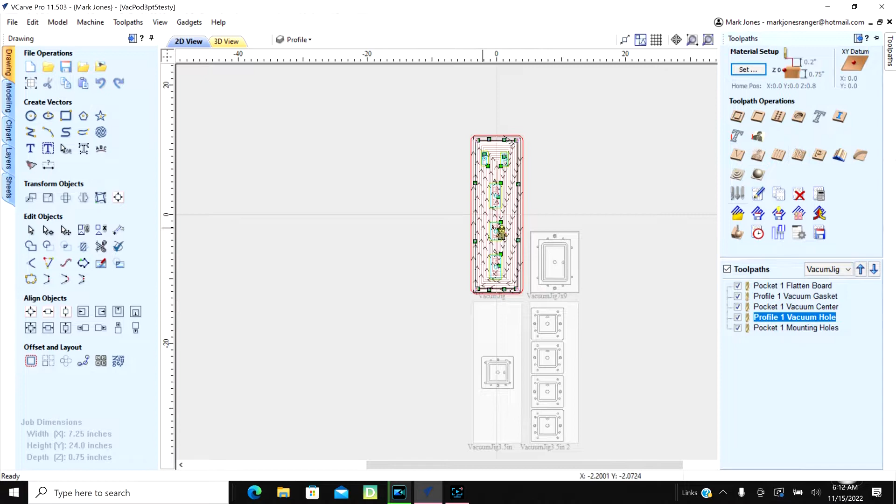All right, we're going to go ahead and open this vacuum pod. I've been learning about layers and making tool paths using the layer and automatic feature, and that's really turned out to be a real blessing for me. I've got my tool path out here, and this is what I'm working on.

Let me go ahead and turn all my tool paths off. Basically, this is a vacuum jig. This is a piece of 3/4 inch vinyl - it's not vinyl, but PVC siding that's got wood grain on the backside and plastic smooth on the front.

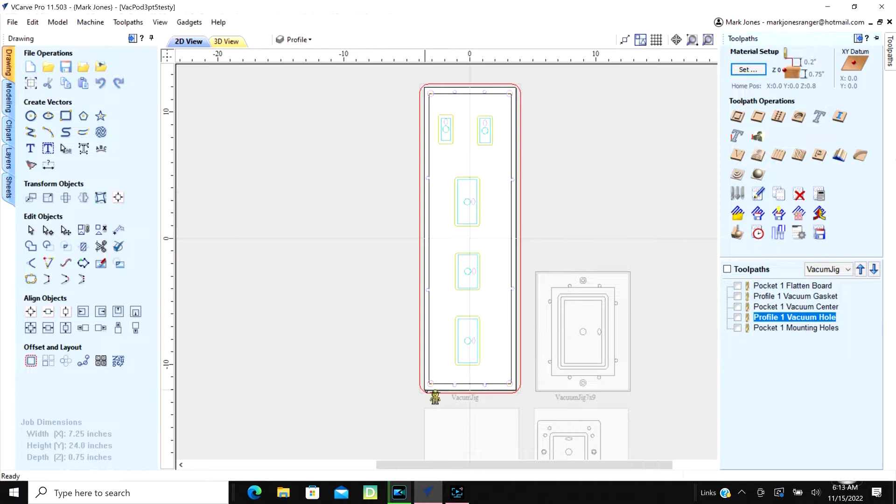What I'm doing is making a Ranger puzzle box, and this is the board. It's 24 inches long by 7 1/4 inches wide, and this fits in my CNC, which is 25 by 25. I've put 4 mounting screws on the corners, and I'll use brass screws and screw them down. They have a recessed head, and I'll go down about 3/8 on the recess and put them in there.

Then I put locating pins around here to hold the board in when I'm locating it, so it comes out pretty much exact. Probably that's not as important on this job, since it's going to be cutting out box joints all the way around each piece - this is like a 6-sided box joint box. When it's done, each piece overlays this at least a 1/2 inch to 3/4 inch all the way around, so that I don't cut into the gasket.

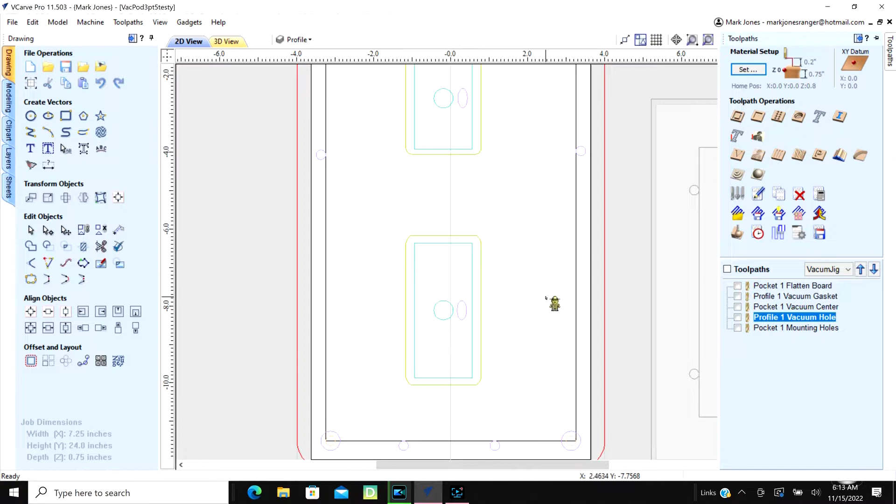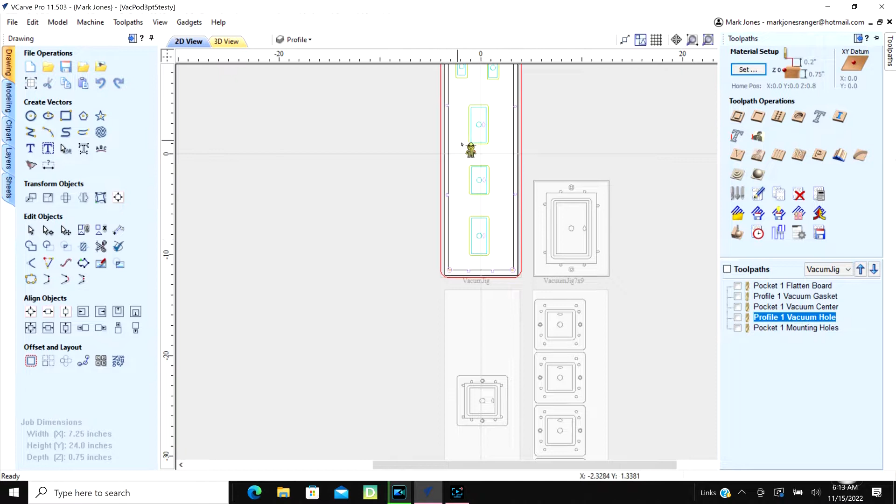It's kind of fun because when I made this, I created the sheet in my Ranger puzzle box with the vectors, and then I copied those vectors and brought them over here, so all my pieces are the same. In fact, this basically looks just like my puzzle box, because I copied the vectors and then modified this for the vacuum. So that worked out real well.

When I cut it, I found out during my previews that it was not cutting out these little ones. It just didn't touch them because I was using a 3/4 inch end mill, and that's the first time I've ever run into that. Generally I'll just cut it for whatever path it is, but since I've been doing layers, I overlooked it.

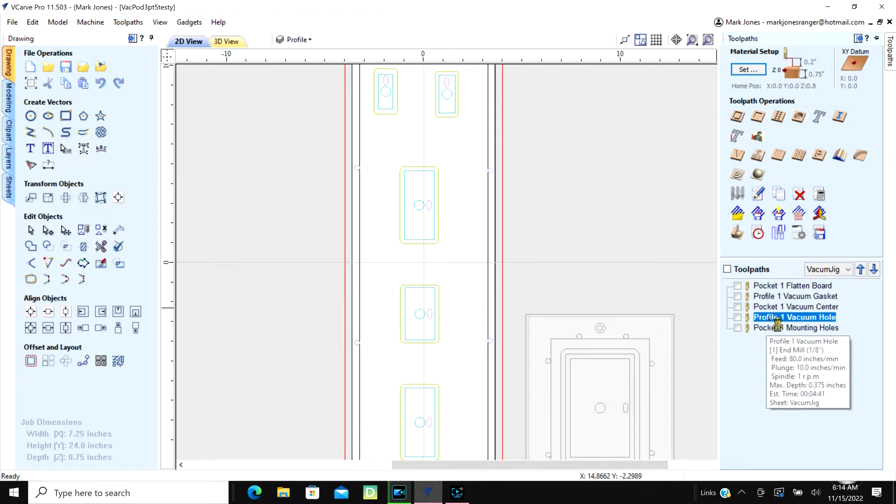I just brought the USB drive back in and loaded it back up, and modified this, adding 2 more tool paths right up in here, enough so the 3/4 inch would get most of it, then a 1/4 inch would get the rest, and then 1/8 inch would get down in here in these little pods. It's kind of fun how all that works.

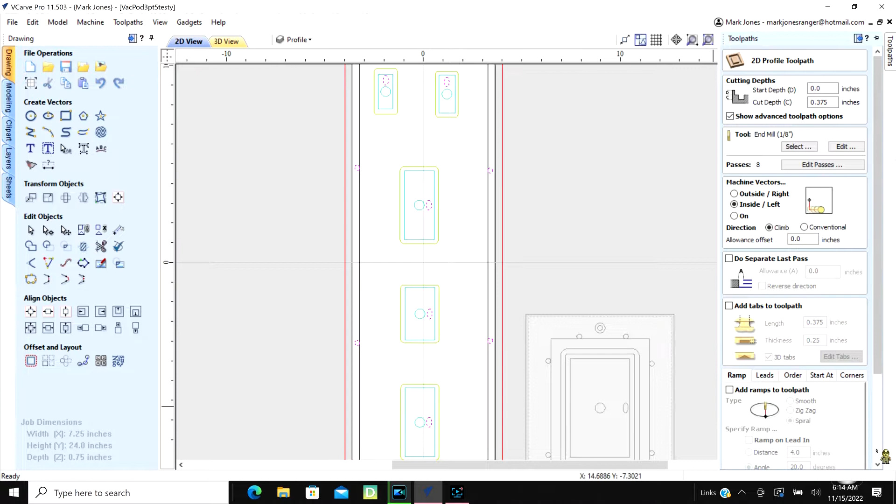Vectric software is so intuitive, it's just really good. All I would have had to do to know that is view it, and it would have shown it. But I was learning my layers and that stuff, so that's something you really ought to look into whenever you're doing these.

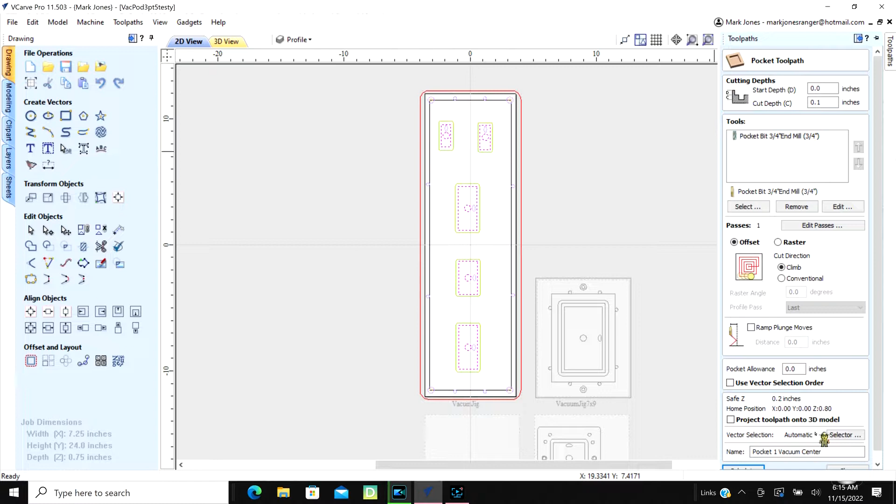This is where I added that in - I had pulled the wrong end mill up. This is just a pocket, and then I added the 1/4 inch and then 1/8 inch, and when I created it, it made the tool paths automatically. This automatic feature, you need to look into it - copy all your vectors to layers, and have a layer for each tool path. That's some sweet stuff.

I didn't see the real benefit of it until I started this project, and now I have tool paths that go across 4 different layouts or sheets, and these tool paths actually fit each one of them. So my tool paths I'm able to duplicate and just import into whatever new vector file. This is kind of my vacuum pod file, and I'll be able to jump back in here, and if I need to machine one, I'll just machine another. I'm keeping them all in the same file, other than keeping separate files for each one, which I can also do.

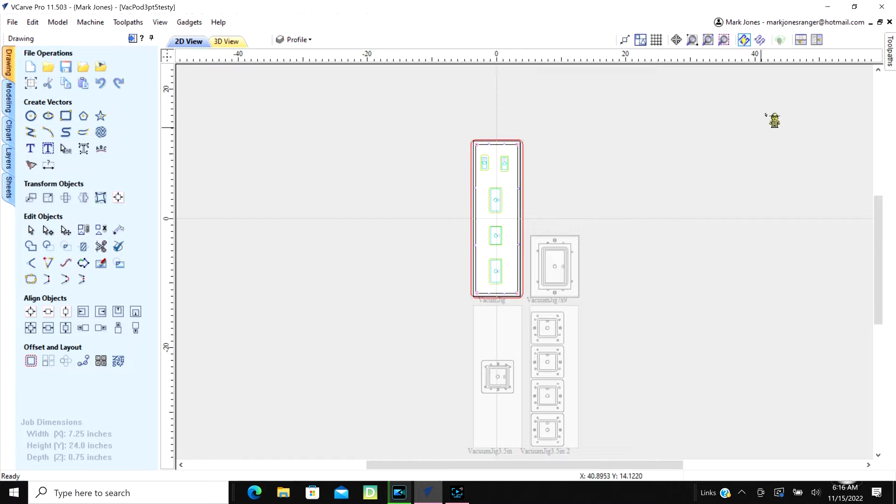But this works so far. I'm kind of learning that technique.

After we design this, I've got this. I'm going to the shop and we'll carve this out, and then when I do that, we'll put a piece of wood on it, 3/8 inch wood, and it'll fit down inside there, and turn on the vacuum and tell it to run its course.

I'll see if this can cut box joints on all 6 edges. This only creates half the box, so I'll run it again, and then it'll cut out the other side, and then that's a finished box. So that's kind of what we're up to, and let's turn this off.

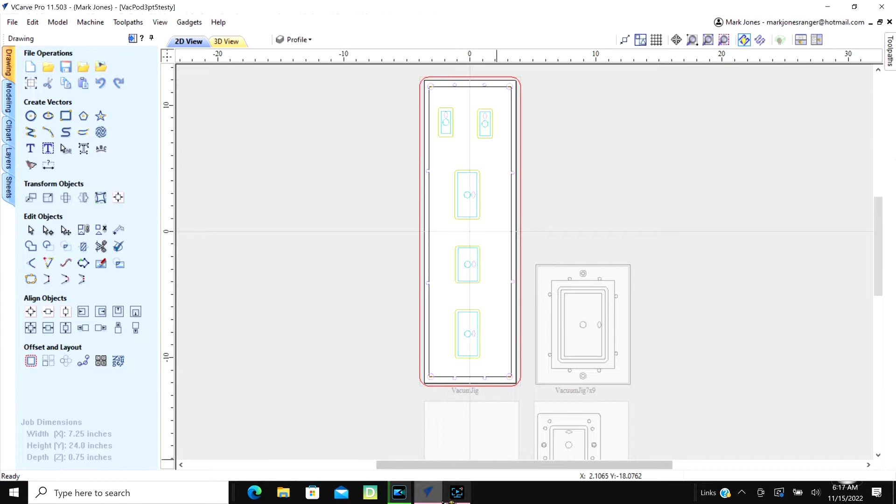All right, I've got this thing drilling the 3/8 inch holes, and as a starter I had to go ahead and put my corner holes in for my mounting, and then I'm doing the 3/8 holes. I just put minimal support, then put a screw down here to the very tail end, and I'm going to put one down here as well. Let me get that done.

All right, I went ahead and put another screw on this side, and when it routes out that other side back there, I'm going to go to the rear of the cabinet and pull this thing up and put a couple screws in over there so it'll be supported totally.

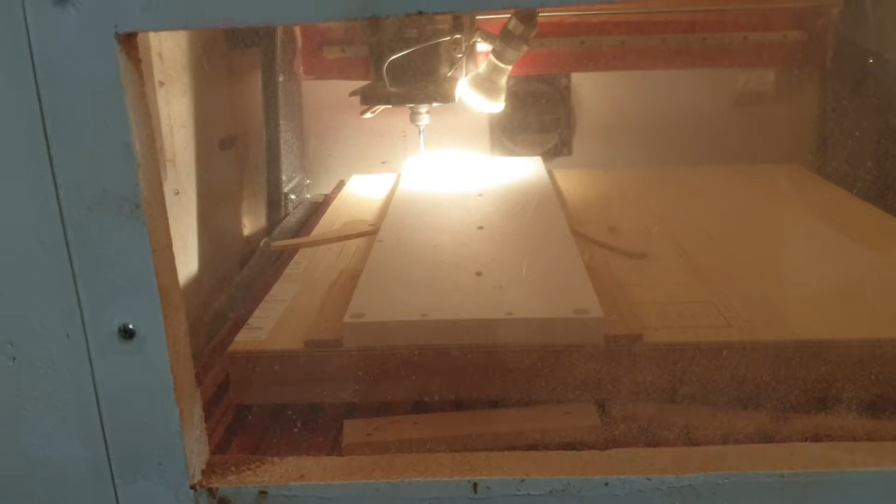Just drilling 1/8 inch holes. These are little 1/4 inch holes. That's the biggest hole that it's drilling, other than the little ovals in the middle. But I'm going to get it down to where it's going to start making the bigger holes. So I want it anchored, and then I can pull these supports on the side out of there if I want to.

All right, so I've got these down, and I'm going to go ahead and drill that out with a small bit, put a brass screw in there, and that will finish anchored. I'll have one on all 4 sides, let me get that done.

All right, got a brass screw on each side of one of those, so I'm ready to start doing the milling. This is a 24 inch by 7 1/4 inch piece of PVC vinyl, and it's got wood grain on the back side of it. It's very much the same thing as what they sell at Lowe's.

And I've got the smooth side up, and that's what I'm getting ready to mill it to. Let me go back to the front side and change the bits.

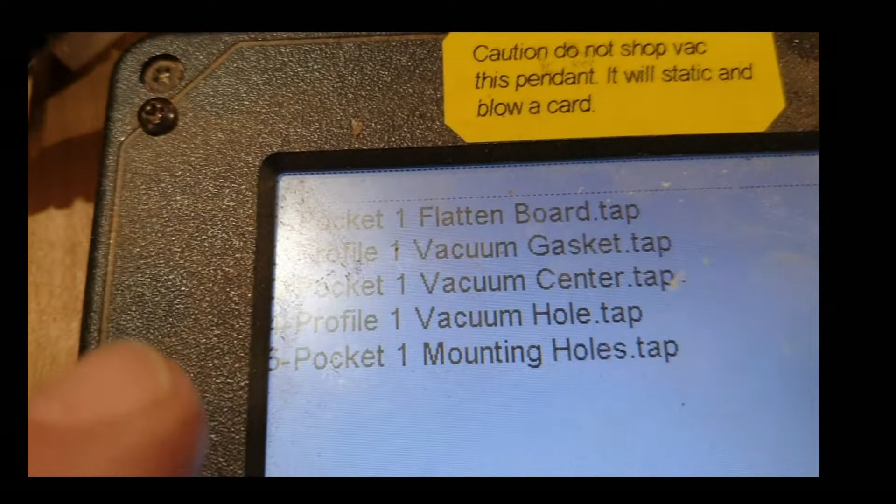All right, I've done the number 5 and number 4, which is the vacuum holes and mounting holes. So those are all drilled in, and those are 1/8 inch bits. Then the center tap, pocket 1 center tap, and then the vacuum gasket and flatten the board.

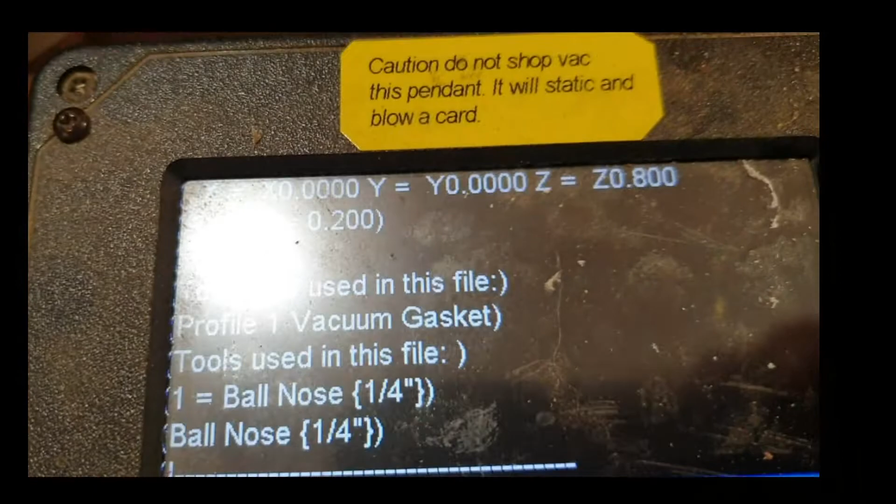So let's go to number 2, profile vacuum gasket, and let's see what kind of bit we need in that one. And it is a 1/4 inch ball nose. So we'll go to that and get that out and chuck it up.

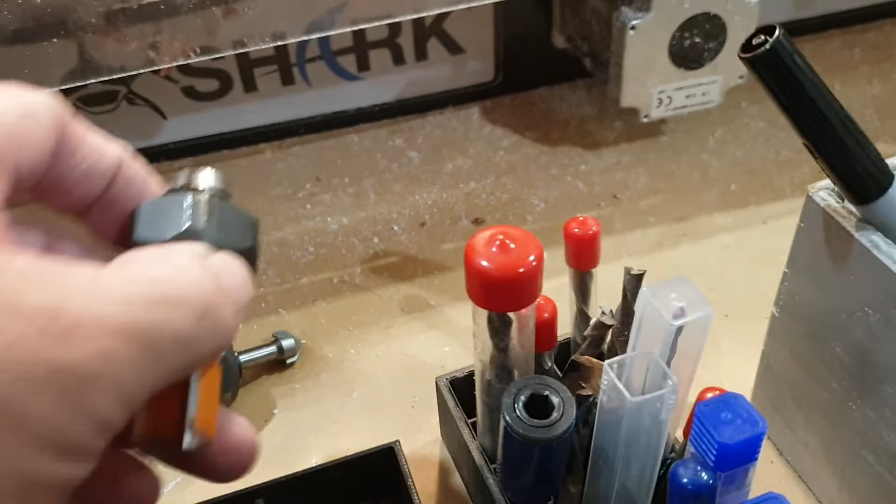You know, some of the things that I do, I'll generally take the bits that I'm using in the process and I'll put them in their own collet. Those are like $5 a piece. You can find a resource for them.

I just chucked up the ball nose that's 1/4 inch, and I just set my Z heights up here. I'm going to tell it to go back to its mobile home, so I'm just going to move the mobile home, and that makes it back to that mobile home right there.

I got a kick out of it. One of the guys said we have a home on the Shark. Well, we really don't, they're all mobile. In other words, you can make home anywhere you want to on this machine. In this case, it's the center of that X, which puts me at 0,0 on my X and Y, and the Shark actually brings it up a little bit higher, but it's ready to go.

So I'm going to go ahead and mill the ball nose, and it's the cord that goes into each one of these. So around each one of these holes, the size of my profile, I'm going to go around and route out a ball nose. I think it's 0.14 deep. So let's get that done.

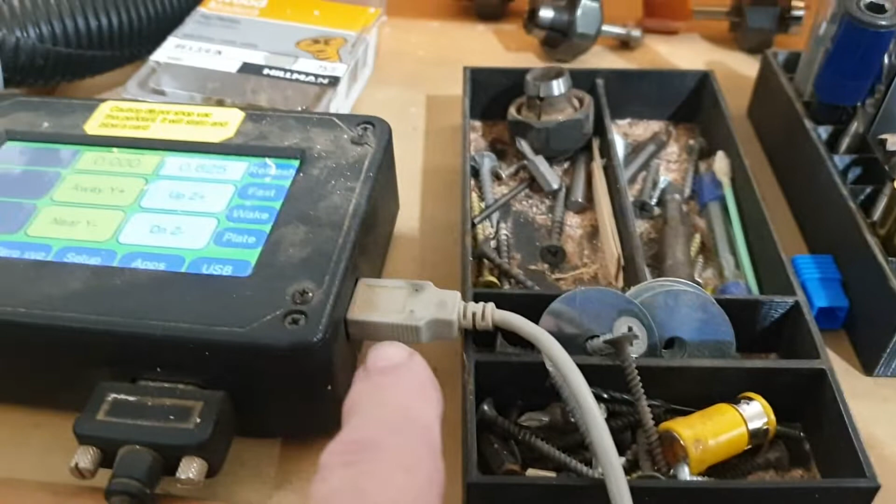A real quick tip is, instead of wearing out the port on the machine on the pendant, I use just a replaceable 4-foot cord, about a $6 cord or so, and I put my thumb drive in it so that I'm not wearing this port out. Just another little tip. All right, so let's go ahead and run the program.

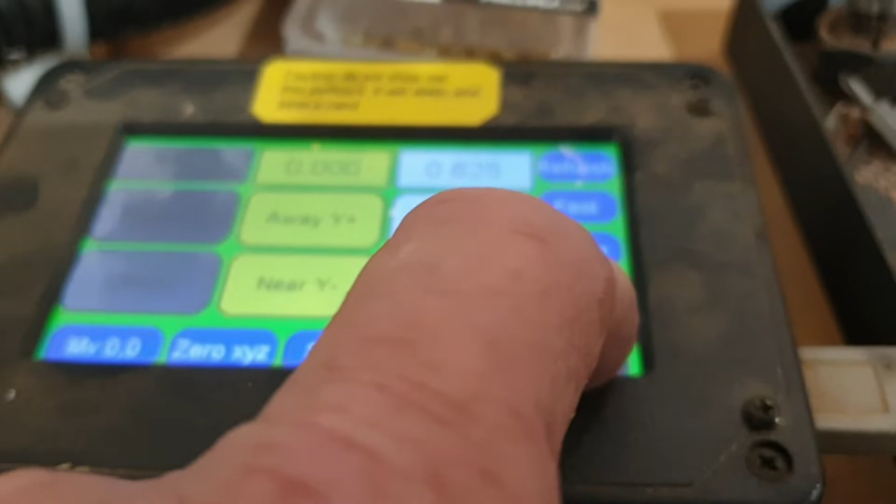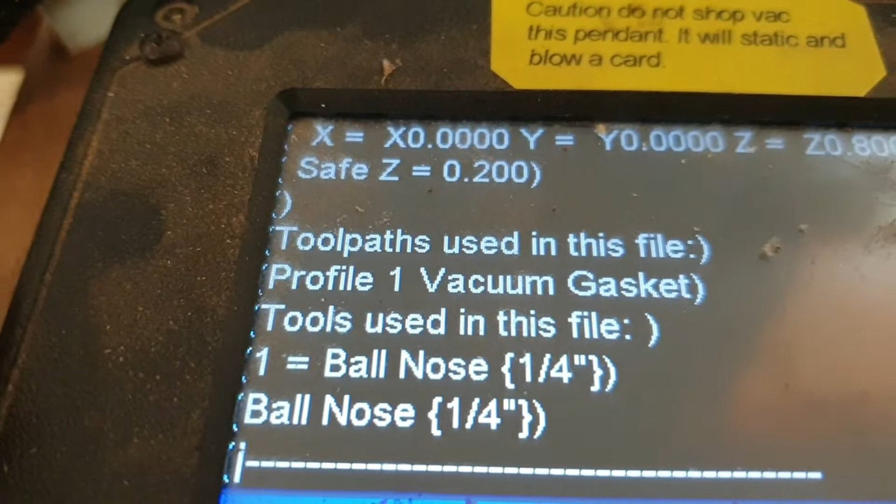I'm going to hit USB, and we're going to do the vacuum gasket right here, and I can go down and check that it's the right one, and it shows that it's the 1/4 inch ball nose, and we'll just tell it to go next.

This, do not use virtual. That's handy if your spoil board is not square, but in this case it's all flat, so I just leave that as an option. And then we click start, turn on the vacuum with this.

And it's going around, starting out going around my part. That's a little bitty small one. This particular vacuum jig has 5 areas of vacuum. My pump will handle 6, each one hard enough that you can't pull it off of there. And so that's going down through there and routing that out.

I'm going down to 1.14, and I'm using layers and the template to cut these all out. So these are copy tool paths using the layers and the template, which is kind of a new thing. This is the first time I've actually used this process. I'm using it on the actual board that I'm cutting, and I'm using it on this jig that I'm cutting.

So when I get done with this, I'll take a piece of 3/8 inch walnut, oak, or maple or cedar and put on the outer perimeters of these holes, the little round 1/4 inch holes. I'll put like a dowel or a little brass thing, stick it down in there. That's my pin location. Then I'll turn on the vacuum, and the vacuum will hold the board down, and then I'll be able to route all that out of there and go around and cut it out.

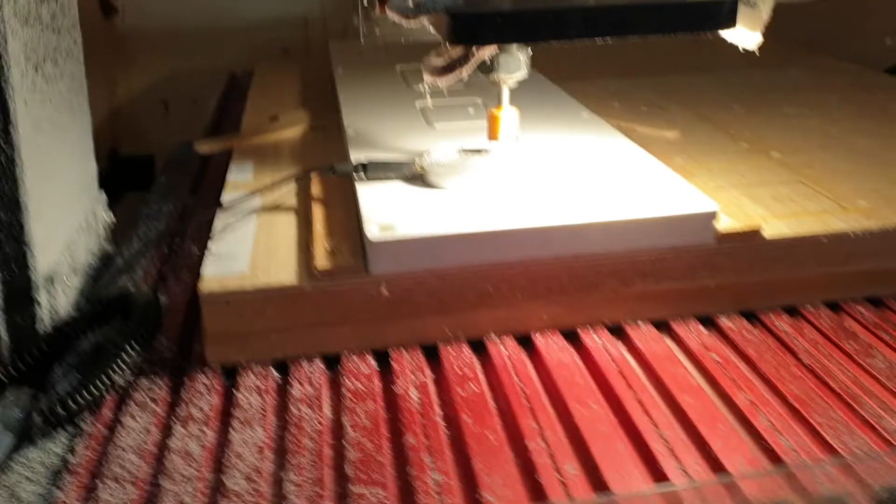Okay, I've Z'd that, so that 3/4 inch bit's ready to roll. Let's go down here and load up our program. That's just where I set that up, so I'm going to go ahead and do not split. I don't have to go back to home or the row home, it knows where it's at. I'll click start, turn on the vacuum. And it's going down there and it's putting a pocket in.

All right, so there's that. Now, in that design, it's supposed to make little round holes in there. So I really need to recalculate that because those holes are so small that I almost need like a 1/4 inch end mill in there because those won't fit with the holes in there. So that's kind of a funny deal there. I'm gonna have to go edit and add one in there with a 1/4 inch and try that.

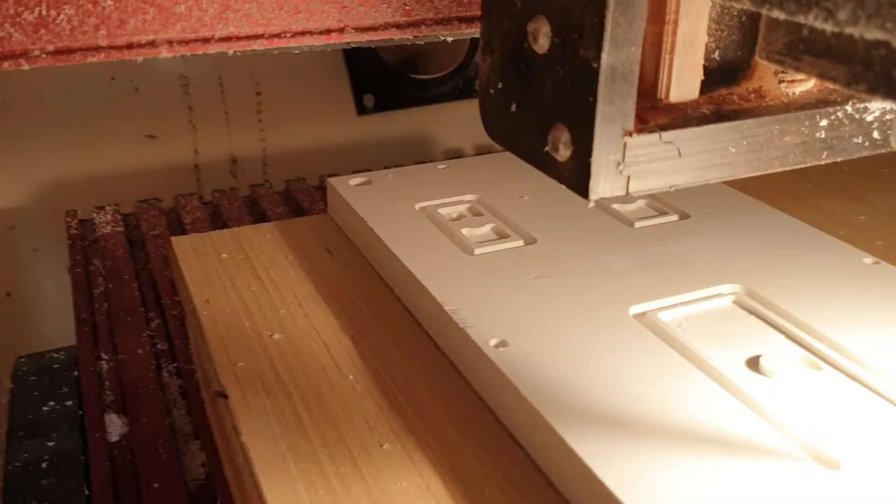The 1/4 inch was able to get in there but not totally clean that up. So I'm going to have it come back with the 1/8 inch, and it'll probably clean these corners up a little bit more, then go and do the back of the very corner and open them up in the center. Let me change the bit and put an 1/8 inch end mill in there.

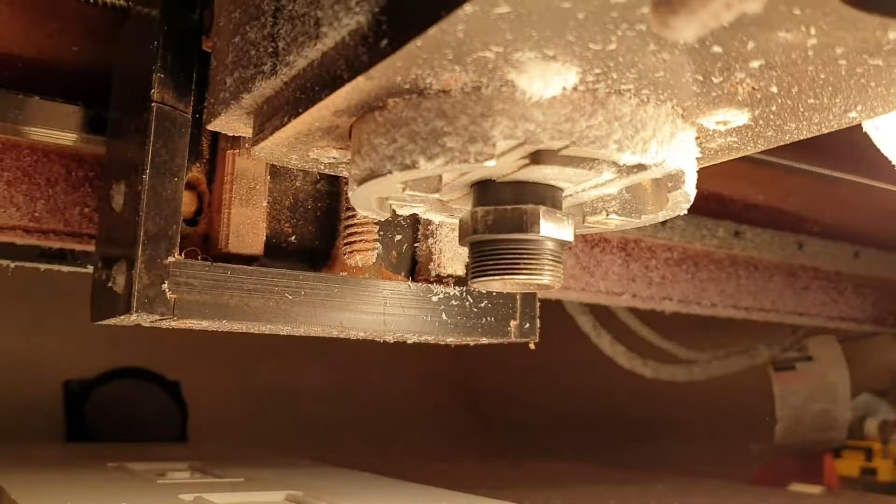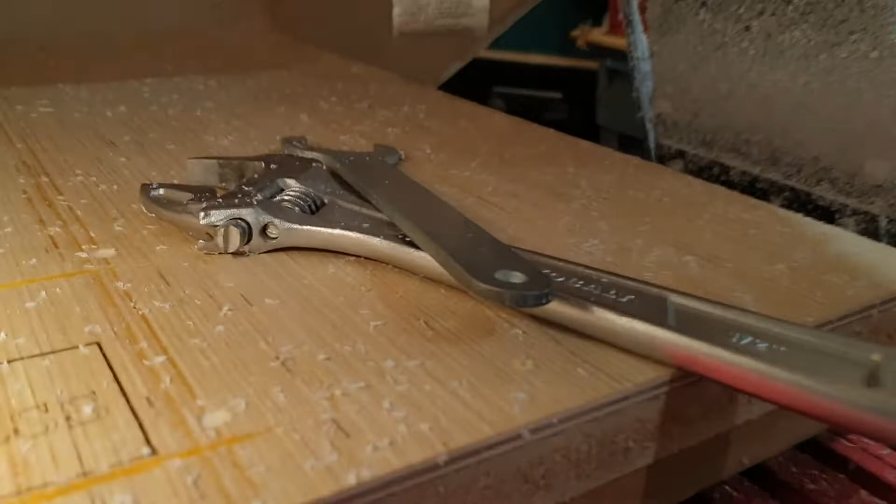All right, we'll put the 1/8 inch end mill in there. You notice I use a crescent wrench and a big wrench. That crescent fits right up there on that collet bolt and fits perfectly, so I don't have to wonder where it's at. Then the other wrench sits on that, so it's perfectly spaced. All I got to do is slip it up there. I've got another one of those thinner wrenches, but the crescent wrench actually works better.

Also, this is an extended 1/8 inch end mill, where it'll cut like an inch thick board, whereas the normal end mills are only 5/8 to not quite 3/4. So this actually does a pretty good job.

Okay, set my Z, got my 1/8 inch end mill in there. Let's see what it does. Let's close the door. The vac is running. Load the program, and I put it as a 3C on here. Let's go down and double check that that's the 1/8 inch end mill, which it is. Click next, do not use, and start. And away it goes.

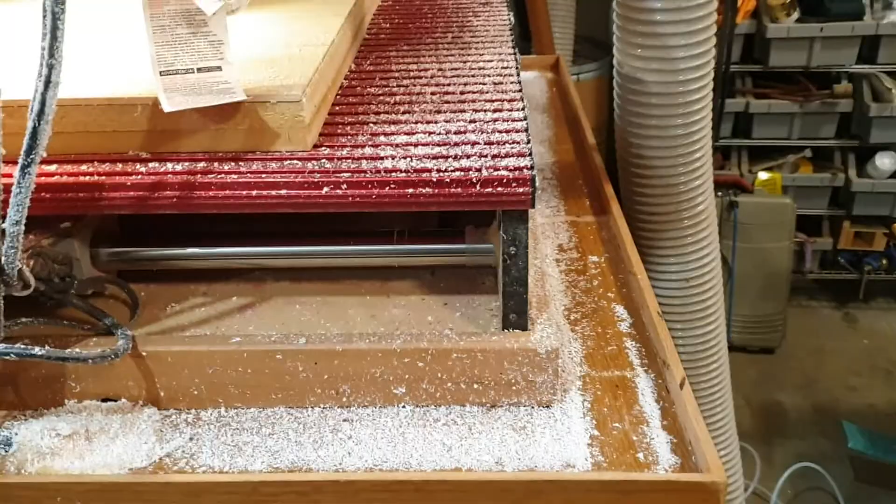All right, fired up the shop vac. It's in that box there, and that's my FastCap reel. Dusting up these in the back, and I'm going to clean out the back side of this box while I have it tilted up, get this PVC dust out of there. I use a little wand on the end of my deal that I keep stuck right there for handy stuff. What a mess after doing this PVC, as sticky as it is just inside the box. So that works out real well.

Okay, after a couple minutes of cleaning, it's all cleaned up back in there. You can see on my floor, I haven't swept the floor yet around there. There's actually almost nothing. Did knock the wrench off with the vacuum hose, tugging it around. But anyway...

It's nice not having to deal with that mess all the time. And look who's bothering me the whole time I'm CNCing. She wants me to play with that toy. There we go, ready? And she just won't stop. She just keeps after it. So that little toy just stays right there, the center of her attention.

Snap-a-rama. So anyway, I'm going to turn the vacuum off. Hit the old remote, turn that off, then go over here and reel the FastCap in. And we're done. I'll take that and put that back underneath the CNC.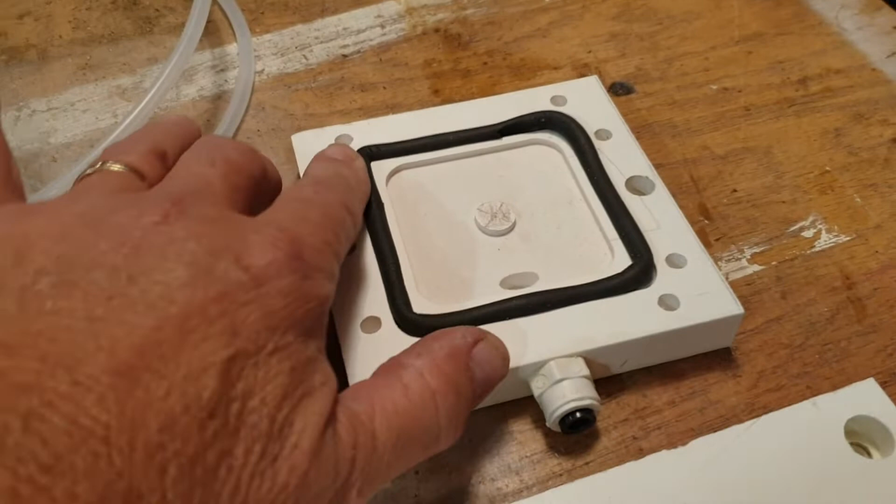This one here looks like I could probably drill straight through on those sides, and then the cord just fits into the side of it. Pull that out, stick it in right around those corners, and then when I put my walnut board in there, it fits in around these pins inside there.

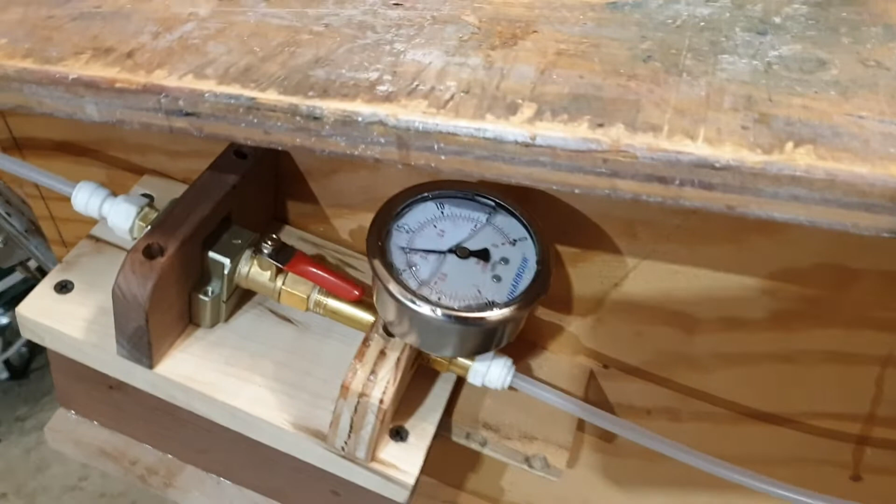I just milled this out, and I'm using my vacuum clamps. My vacuum pump is over in the corner, plugged into this little guy, and I've got like 18 inches of mercury on here, and this is holding it. The back side of this is right here, and it's clamped down.

You can lift the table up with it. See here? So it's there. I'm going to go ahead and drill these down straight and see what I can get with it. Probably use a... I don't know, make me a block, I guess, to drill with.

Alright, so I have that clamped with my vacuum board on there really tight, and I drilled a hole. I'll go down here and drill this far, so I'm going to chuck up this bit into that and put me a piece of tape around it so I know how far to go down, and we'll see how we can do with it. Okay, that worked good.

Came out right there and down through that. Didn't come out through that, so I moved it over to that line there, and it's the same depth. So I'm going to drill that one, and then I'll move over and do the other one. Let's get those done. All right, got those all four drilled down into the cavities for the vacuum there.

I need to drill a 7/16 inch hole in each one of them for tapping, and also need to drill that side there. So I'm going to go ahead and turn it around and do that since I have the bit chucked up. And all that is a matter of turning off the vacuum.

That was as simple as pushing it up through the table, line it up there, and she's down there. So I'll go ahead and drill this one out. It's probably real close to the same height as the other. I'll double check it. Let me line that up, and away we go.

Okay, I want this to line up right, so I put the 7/16 in that same hole that I just did, that 3/16 inch hole for the vacuum hole. I'm going to drill this down. It'll self-center and go down not quite 7/8 of an inch, probably about 5/8, 7/8.

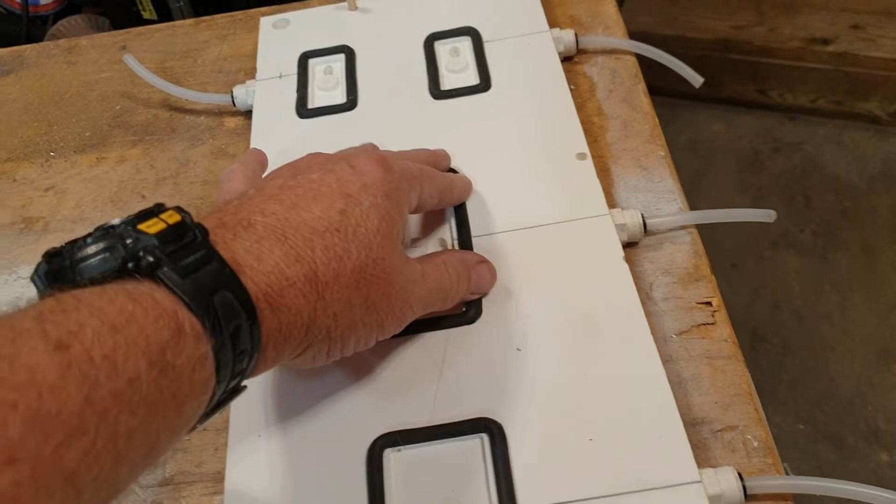All right, there's my puzzle box vacuum jig, and I make basically one cut of all these, and then I make another one of that.

All right, I played around with this a little bit last night, and my camera was full, so I couldn't take any more pictures till I got some of that off there. Anyway, I played with it. Sucks there and holds there just fine.

I did have one little issue right over here where my PVC threads weren't holding too good, so I may have to end up putting some super glue or another bit of glue or something around that. The rest of them held just fine, but I can get like 18 pounds of pressure on it, or 18 inches of mercury.

Anyway, I'm going to mount the thing back up, and then I'm going to cut some wood to put in here and give it a cut, see if it'll go to town.

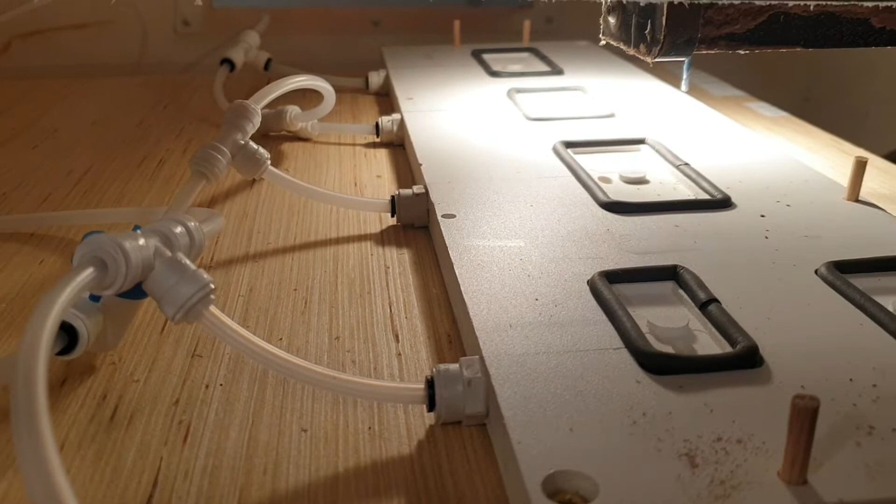All right, I've got the jig mounted in there with the screws. They just went right back in the holes that I had milled it with originally. So I'll basically just set the zero over there off the center of that, and it'll be zeroed in, ready to go for repeat city.

All right, I have a whole mixture of boards. These are some 3/8 inch boards. I glued them together because they weren't quite wide enough. And then these are some boards that I had in my stack. This is all wood that I had milled down from logs. And these are a couple of boards I got from an old barn and resurfaced them.

Anyway, so I've got 1, 2, 3, 4, 5, 6, 7, 8, 9. I have about 10. I think this one I'll probably resaw on the bottom. Or this one right here, I'll probably resaw into 3/8.

So give me a little time to get out the old resaw bandsaw and fire it up for a minute. All right, I got those all resawed down to about 1/2 inch, maybe 5/8. Some of them are still down at 3/8, so I'll run them through the planer next.

I've got the bandsaw out, and I checked the fluid level in the vacuum pump, put a couple, 3 teaspoons of stuff in there. Probably got a little full, but it'll be all right. I use mineral oil on that, a petroleum based. The Dust Deputy is about half full, so I won't mess with emptying it out. A little vacuum behind it.

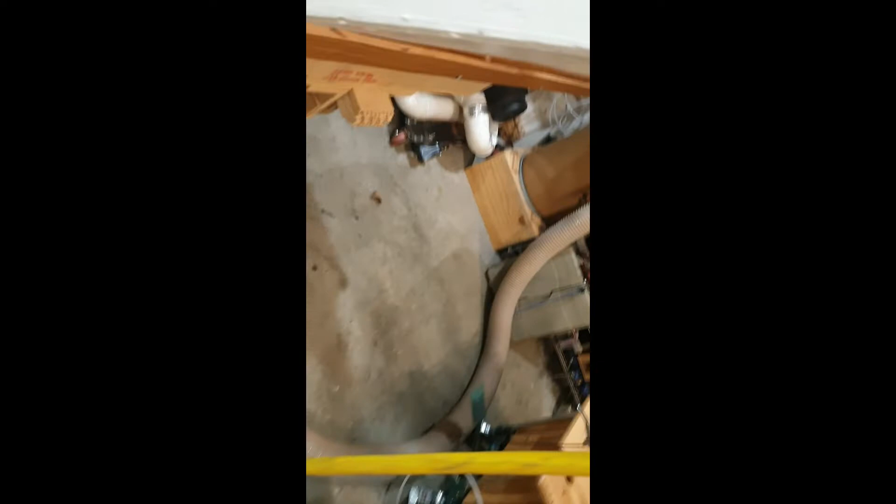I noticed my adhesive had given up a little on my aluminum and it was coming out. So I shot it with a little bit of contact cement inside the tube in the pipe, and put another wrap of aluminum on it. That ought to hold it for another year or two.

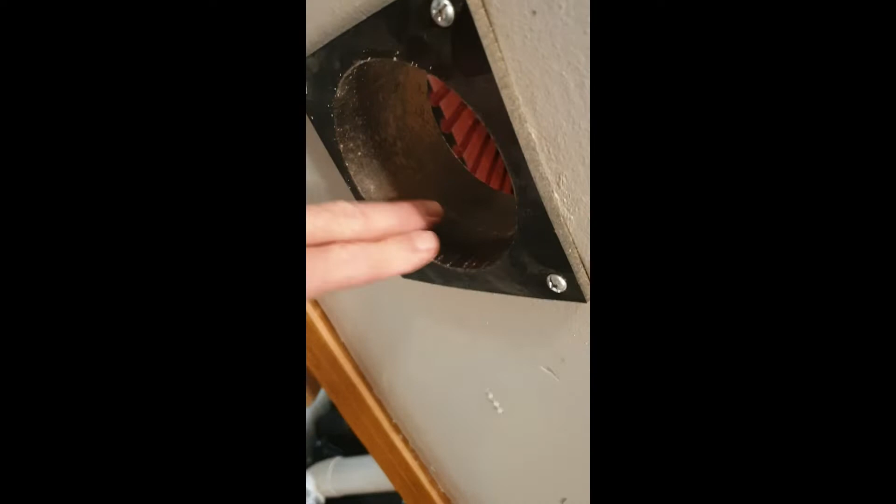Always got to do some kind of maintenance. This is getting where it slips out here a little bit. I'll probably shoot a little contact cement in there to make that a little bit stickier. One of the magnetic things would be nice, but I'm not there yet.

Just shot a little bit of some crafted spray adhesive in and around that corner, went around the inside of that to make it a little bit sticky. I'll let that dry before I stick anything in it.

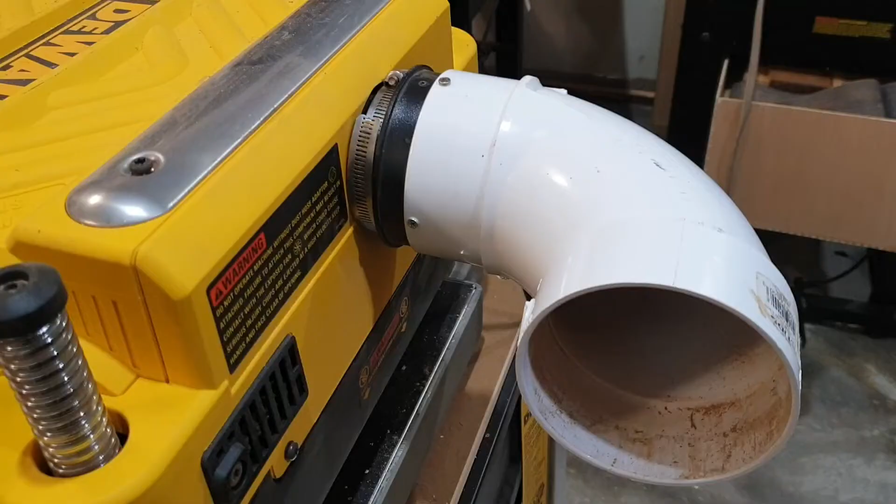All right, for you guys that have the DeWalt 735, if you put much on here, on this one pipe, and you just bump it a little bit, you'll get a crack in this little elbow or this little notch that's inside there. This one's all right because it's around it.

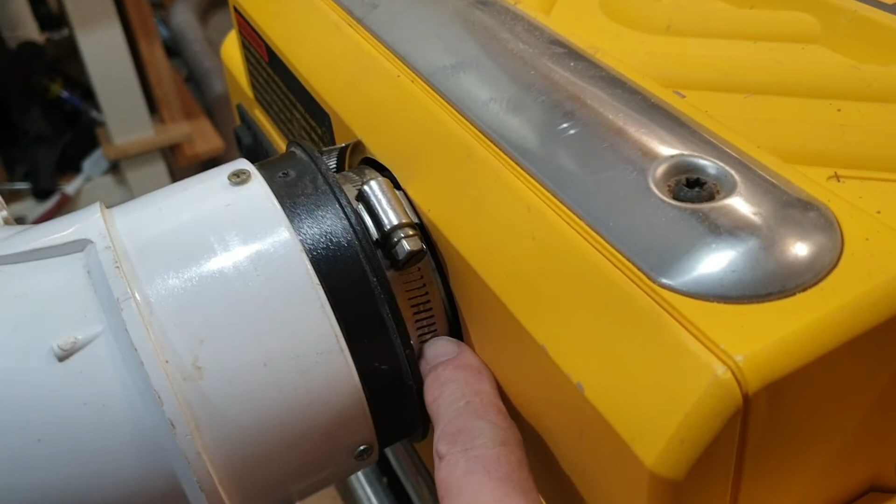That one's open on this side, so I've had to put glue, kind of a super glue, some of that DAP 30-minute bond glue on there, and then I put this on there to back it up. Hasn't lasted long. I've seen a lot of guys say this was broke on their DeWalt's, so they ordered a new one in, but that's just a fix I did with it.

I thought about melting some plastic with a plastic weld, but this will probably work, so we'll see how that lasts. Anyway, getting ready to hook that up to my planer dumpster, and hopefully I won't have a mess.

All right, well, that worked flawlessly. Planed all them boards down, one of them was 1.5 inches down to whatever, and got them down. This is just the mess that I have on the floor, which was good. Things working just the way it's supposed to be.

Planers, you just have to have some bulk. These 5-gallon buckets are a joke because you fill them up in no time flat. But anyway, this works good.

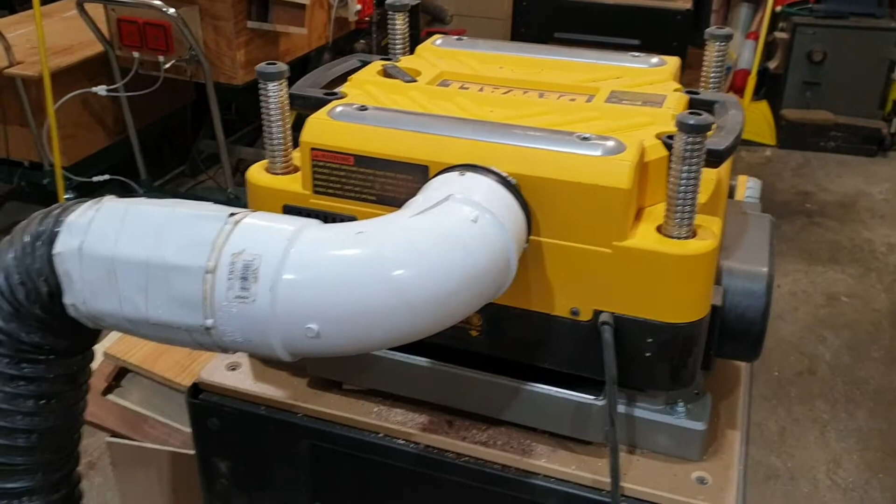Got to keep maintenance on it. These seals seal this lid down. I probably had more trouble trying to get that to seal down than about anything I've worked on. But it's been on there for a year and a half, and every now and then I have to do a little work on it to get it right.

These little jobbers here go down, and I need to extend them out just about an inch longer so they'll reach all the way in there. But they work, and it only takes a minute to get in it, so it's not too bad.

When I'm done, I'm going to plan on leaving these kind of as an onion skin on them, and I'll run them through this because I've never had this where I could do that with. So I always had to cut through them, but with this thing I can actually sand them and clean them up with onion skins and whole work.

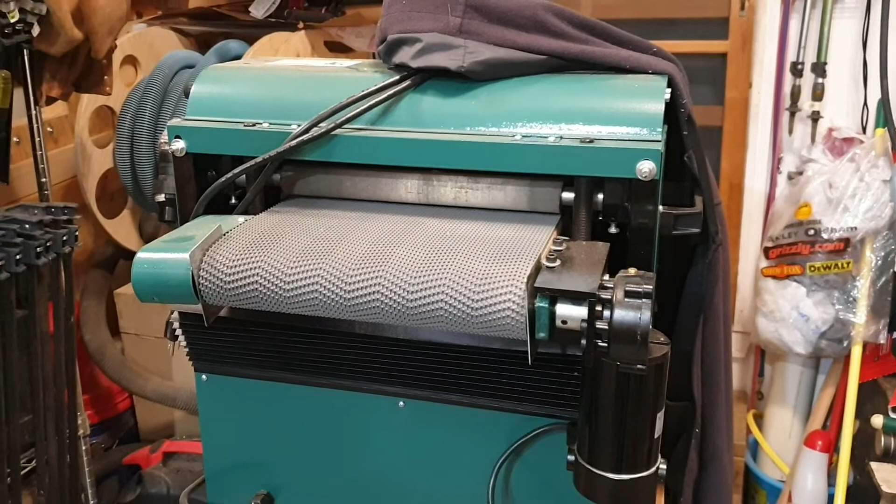So I'm kind of anxious to get this thing, put this thing to work. I have not really done much with it other than sanded a couple little boards.

So we'll get her going here in a little bit.

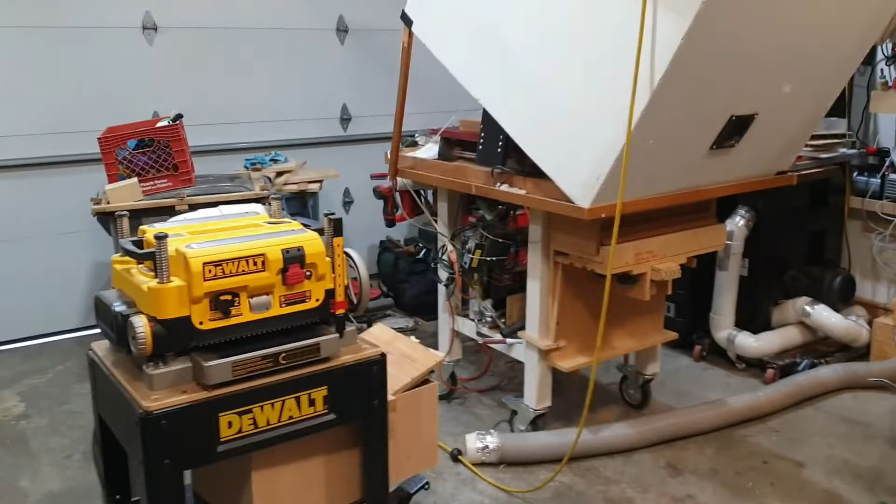Well, it's time to clean up after that planing. That's not too bad from all the planing, just a little bit of mess. She's wanting me to get the vacuum out. Pull the vacuum over here to the job.

Pull the wheel out. Take the wand, and in a minute here I'll vacuum that up and clean it up.

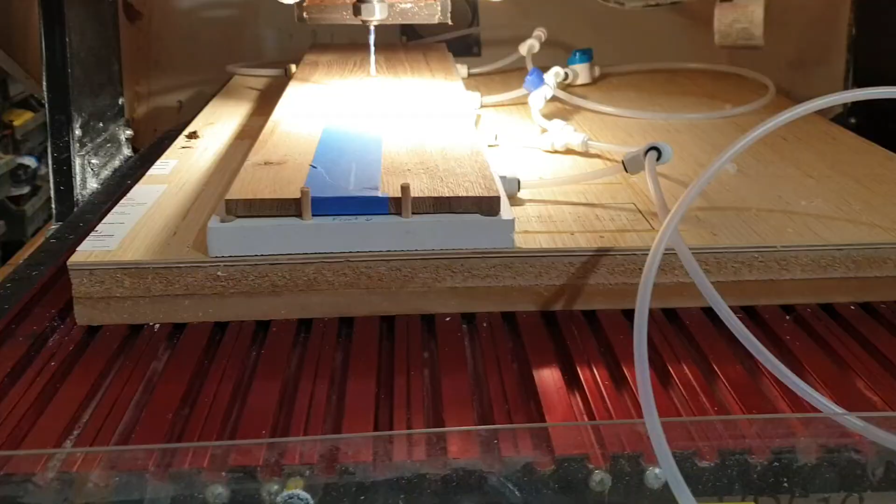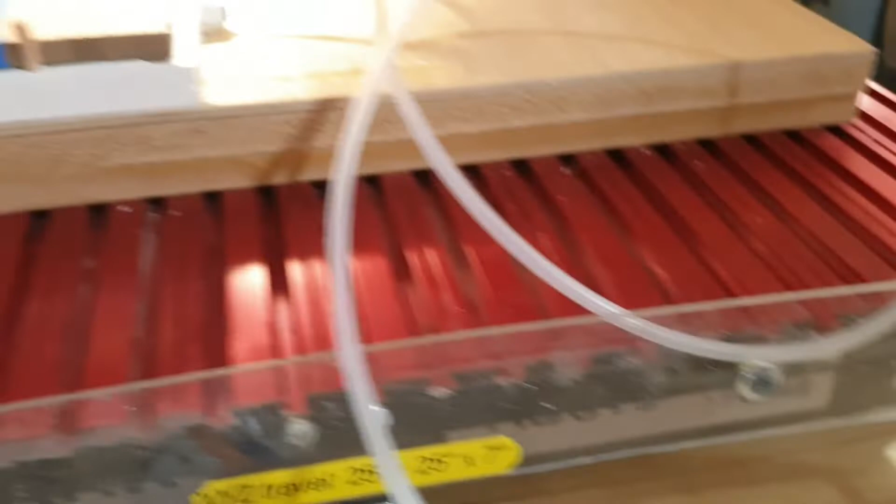Alright, learning curve. I sit there and mess with this thing for quite a while, well, 5 minutes or so. I just couldn't get it to hold a vacuum. Only got like about 5 pounds on it. I mean, it was holding it, but it wasn't what I wanted.

So I thought, well, let me put a piece of tape over the thing. In this case, she can grow up to 15 pounds or 15 inches of mercury. So whether or not this works, I don't know. That stuff may go flying in there, which direction. I did use my scraps on this, so we'll find out.

I'm ready to run my first set, and I was having to troubleshoot the leaking, so I went ahead and put some valves in between each little section. I could have done the same thing with foam in the little blocks, but this way I was able to troubleshoot it. It's a brand new jig, so I wasn't sure if I had any leaks or where they were at. Last night I hooked it all up, so I was pretty sure it was good. But I do have one of these little nipples over here that's a little bit loose.

I was going to have to put some juice on it to get it tightened up a little bit. But anyway, it's holding, sitting here at 15 inches of good stuff, and the locating pins are in there. It's pretty straight. I'm going to cut out a box joint, so I'm going to let her rip, tater chip, and see what happens.

All right, well, I thought my center on this piece was on the center, but apparently my home position is on my lower left. So what I'm going to do is go ahead and change that piece to that. Now, I had this file set where it was doing the box creator, and that all takes the lower left. I also had it doing the one that makes many pieces, and that uses the lower left corner too. So I'm suspecting that's my center.

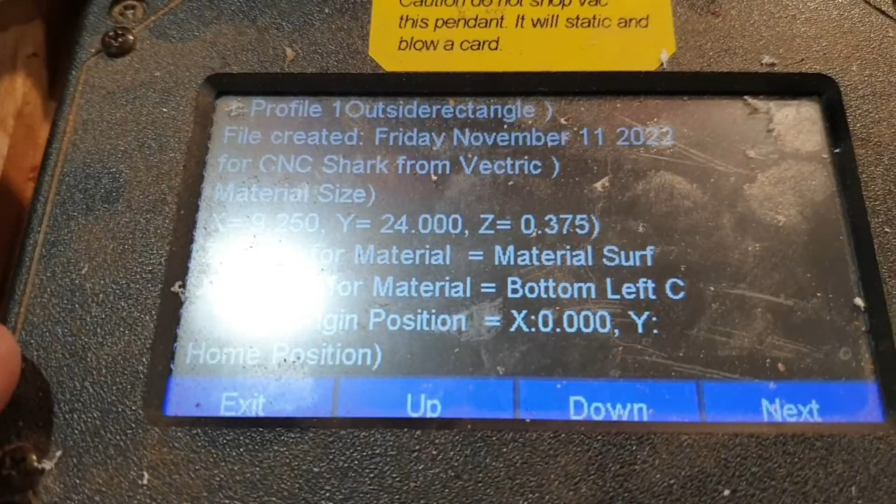I guess I could look at it here, and it'll tell me. Let's just go down and it'll tell me where the center is. Yeah, bottom left corner, right there. So that's funny. Anyhow, 9 1/4 by 24, so that would actually put it right here.

So we'll just see what we got there. Alright, well, I've used my locating pins. I went ahead and stuck a couple of brass ones in there just to see if it lines it up easier or better, just because I don't really know. And actually it made it easier because there was no guesswork, it just fits. I'll leave the wooden one in there, I don't really care if I hit those.

This tape was good, it's holding at that 14 psi, or inches of mercury. I've got my centers put back to the center of my work, so home is at the center, and I'm ready to run this thing.

We'll try it again real quick. All right, well, I had it programmed right, I must have not set my Z properly. That's the only thing I figure. So we're gonna let it run again and see what happens to it.

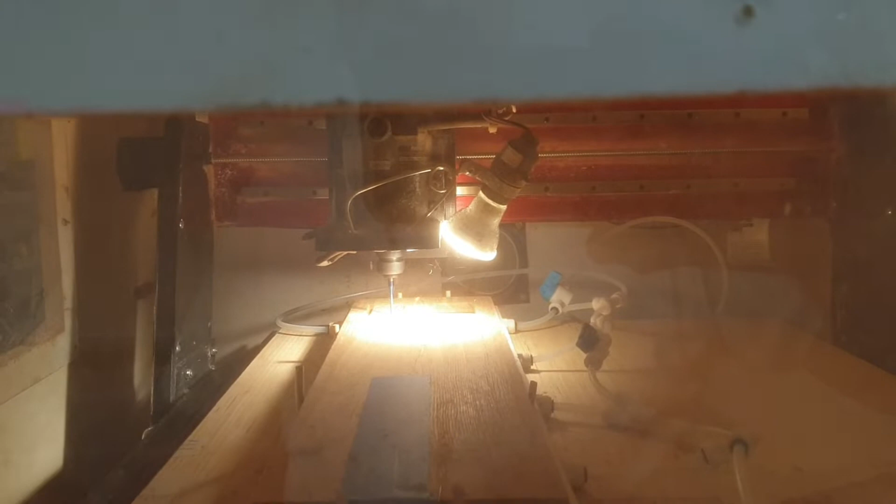That first pocket is the outside. There's that. Here's what it's doing there. Doing something. Back to zero.

Okay, well my height is set about right. We'll go down and run the other toolpath. And outside rectangle. Go out there and cut that thing out and cut the other one out.

Go down to 3/8 of an inch. Hopefully it'll leave me a little bit of an onion skin. Go around that edge there and cut that out.

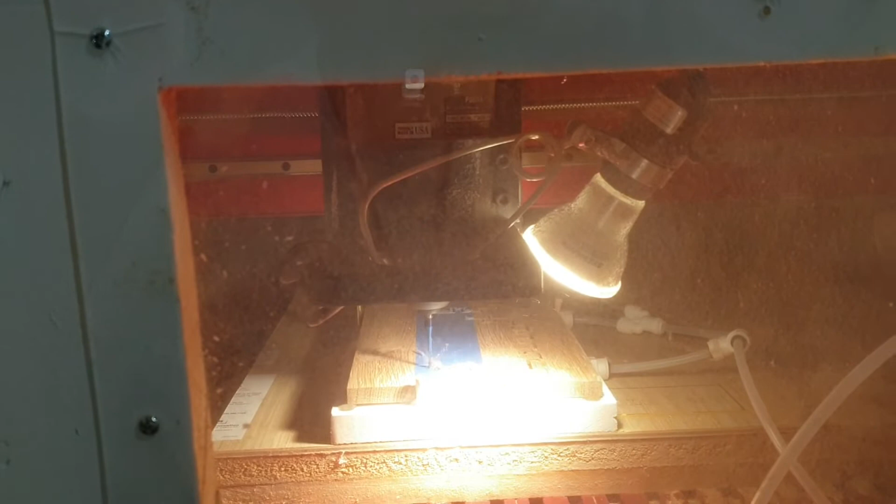Those pods should be down there in the inside this area where these things are cutting out. We'll find out. I think I just had my Z wrong, but it goes to show that, man, you could buy a $1,500 vacuum plate in one sitting, go through that and ruin it. So I don't have anything in this thing that I can't replace or remake in, you know, an hour's time.

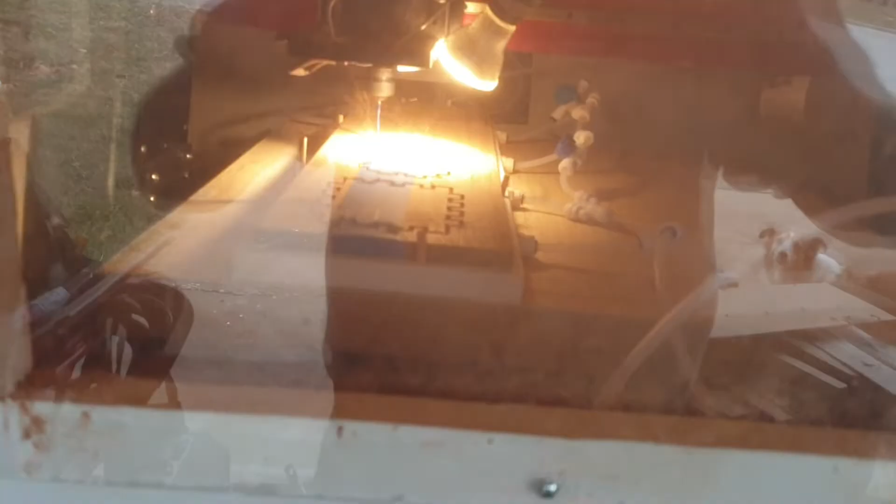So let's see how she does. Hopefully it's still holding good. My inches of mercury is down to about 13. Got a tab there. We'll let it do its thing. Alright, going down cutting the third profile.

Even though that one's got a scar down to the middle of it, not anything I can't deal with.

The snow's still locked on the ground. It's kind of chilly out. I just opened the door. She's wanting me to play with her.

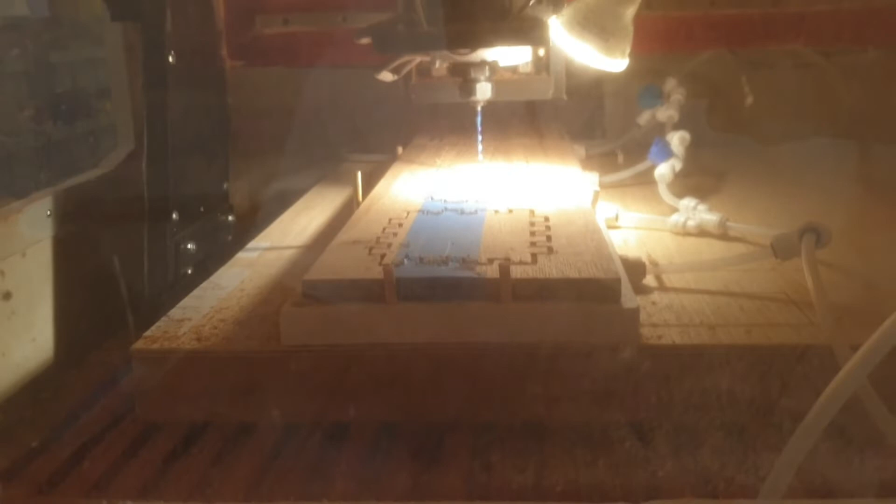Alright, I finished that with 15 inches of mercury. Cut all that out. My pod's still holding. And that's good. Let's see what we got now.

We'll pull this thing out and look at it. Okay, the cool part about all this is it's doing exactly what I was hoping it would do. I used my locating pins, put the other piece back in there.

I can tell it to go, and it's just vacuum. I just basically hit the lever and brought it out here. This piece, even though I didn't have my Z set, yeah, anyway, this is my first piece, so yeah, that's part of it.

I've got my onion skin. That little guy right there will help me out. Before, I would not have planed this or done anything with this. I would have recut it and then cut into my board, because that's just a hair of onion skin left in those, so we'll see what happens.

This guy right here, something don't look quite right on that one right there. I should not have cut that last little block in there. I'll have to look at that on that cutout and modify that, but everything else worked out fine.

So, kind of a unique thing. So, there's that. That looks about right. And I'll probably cut another one and see what it does.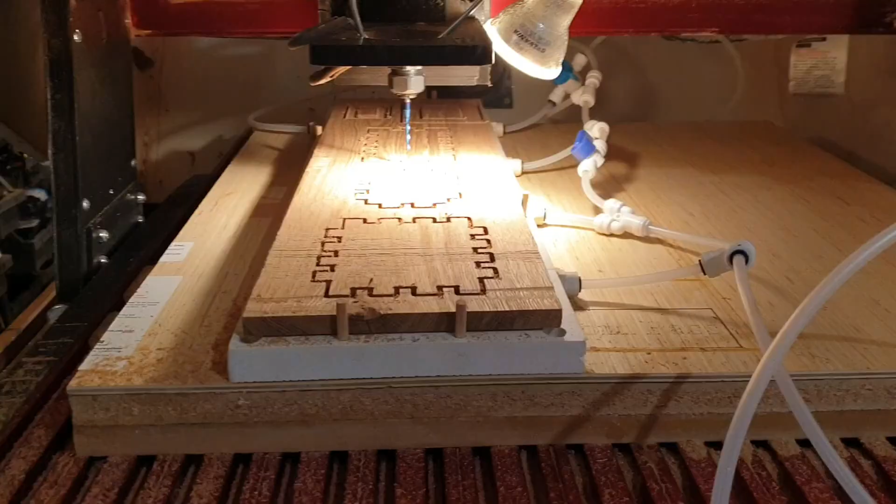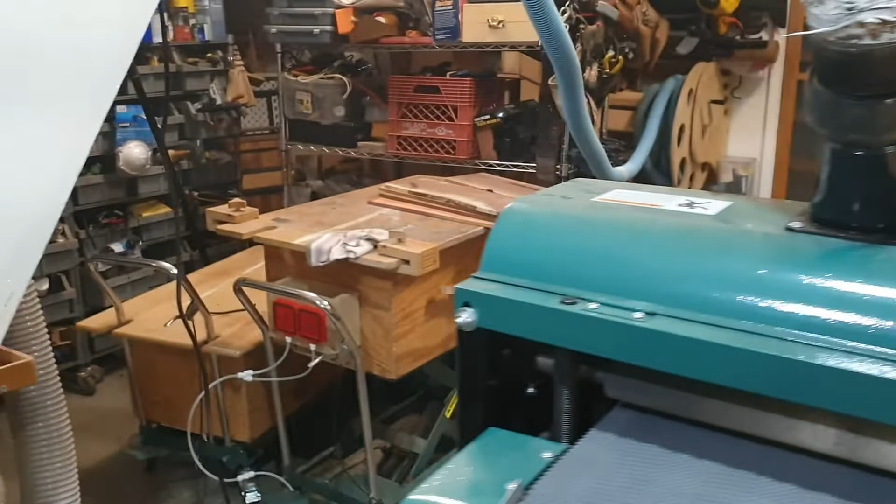Alright, that came out real good. Got two pieces over here that are ready to go. Pulled the vacuum off of it and up they come, and while I'm doing that I could be running another one, but I want to make sure everything's fitting, and since this is the first one, that worked real well. I'm gonna have to repair my little gasket over there.

I don't know what I'll end up doing. I may just cut a little piece and mortise it out, put another one in there and re-drill it, seal it in there with some PVC cement, so maybe I'll fix it. Alright, anyway, I did fix my tool path down on the other one, and I had added in there, so I'm pleased with what I've got so far.

So let's go sand this thing and see what it looks like. Alright, I'll just finger it assembled. I didn't do nothing, didn't sand nothing, and I just stuck it together. So looks good, fitting good.

And there's my two puzzle pieces that'll fit down in there. I'll have to drill them for the bearings, and then there's these 3 pieces right here. This is an extra and that's an extra, basically. The rivets fit right down inside that thing right there. So, there you have it.

And using a sander with the onion skin on it, I think I'll just cut a little deeper on my profiles and cut them out. So next time I'll just cut them a hair deeper.